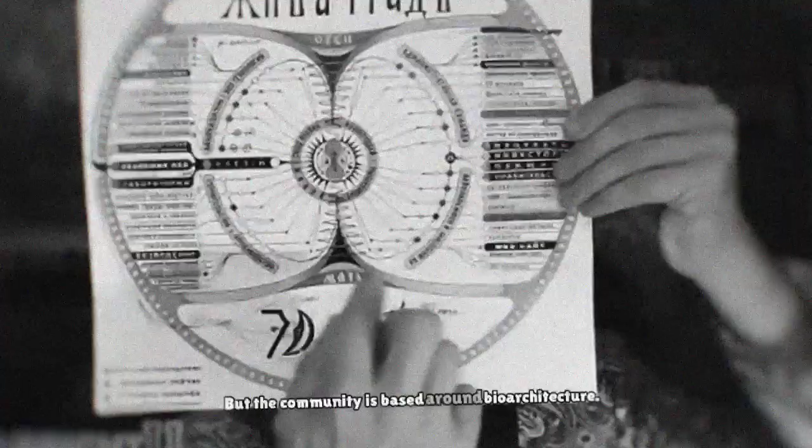People need affordable ways to build and live in homes. That's one of the reasons why I wanted to talk with you, because we need a different approach. Community is based around bioarchitecture, an intricate ecosystem inspired by permaculture. That's how we get these food forest communities with bioarchitecture and people actually enjoying living in them. This isn't just about building a house. This is about community, about how we function as societies.

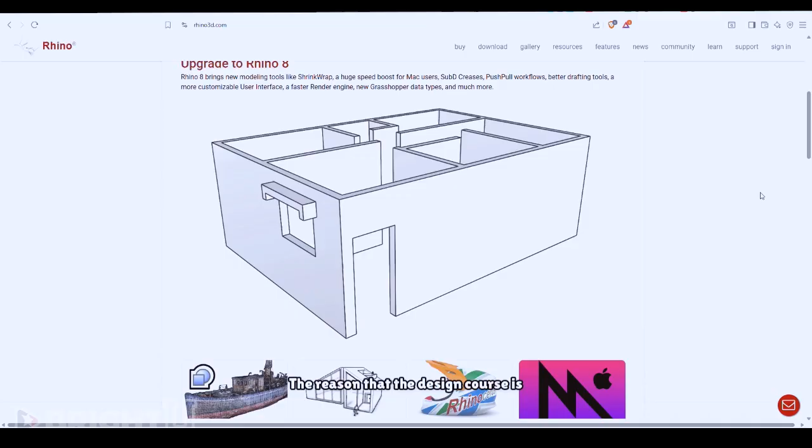The reason the design course is important is because you want to be able to draw your own home from scratch, right? Because you might have a different size than what I wanted. You might be a short person and not want a standard big door, or you want 3 bedrooms because you have 3 kids or something, you know what I mean? So you want to ultimately be able to design your own home.

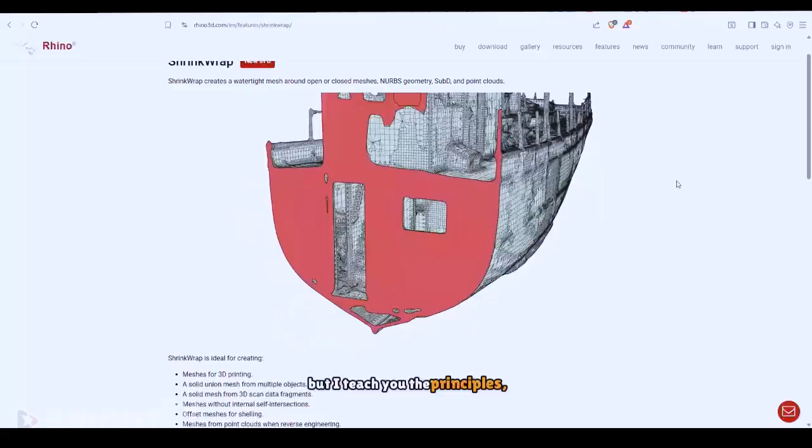But I teach you the principles — there are very important principles of bioarchitecture. The first 4 lessons cover the principles, like how close the openings have to be to each other. These are what I learned from the masters such as Mike Reynolds and Nader Khalili and those amazing architects in America, by the way.

After learning from them, I came back to South Africa and built out everything that was taught to me, and I ran multiple workshops in about 5 countries. So I replicated everything I've learned and added my own flavor, and the design course allowed me to design all these amazing bioarchitectural structures, which were very much Earthship inspired, with the greenhouse on the sunny side. So I'm about solar passive architecture, and I can show you quickly what I'm designing right now.

Could I share my screen? Yeah, hold on.

I have a question before we do that, because you mentioned you've taught these principles in many different countries around the world. One question our audience might be asking is, are your principles appropriate for every climate? Or does it only work in dry places, or only in warm places? Or can they be applied anywhere?

Well, look, Mike, the beauty is that for the last 5 years I've been living in Russia, and I'm developing a home right now for Siberia, which has Canadian-type temperatures. And the 25 years before that I lived in South Africa, which was a hot and dry climate.

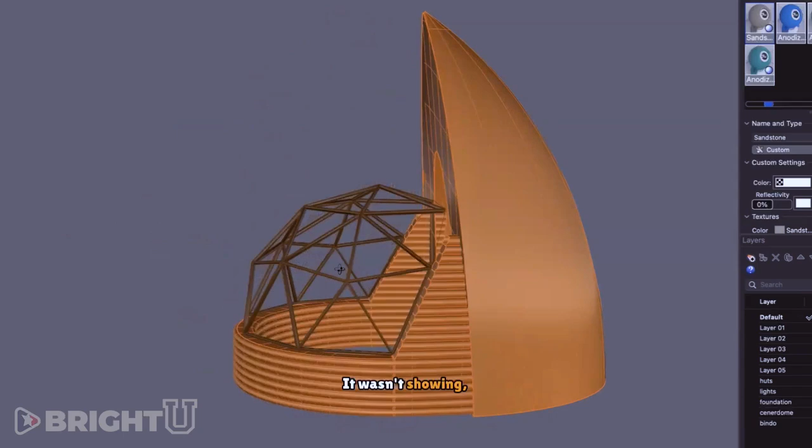Let me show you the tiniest little home, this is just the tiniest, from many years back. It's on my screen right now, I wasn't planning on showing it. But that's like a little cob earth dome and a little geodesic two-frequency dome, and this doesn't even need registration with authorities for this kind of small structure.

The coolest thing is that we're planning a waterfall of water that runs through a wetland, a water feature you can stand under and shower in. To building authorities it just looks like a water feature, a constant waterfall that keeps falling. That's why you can get away with not installing plumbing, but you can actually have a shower.

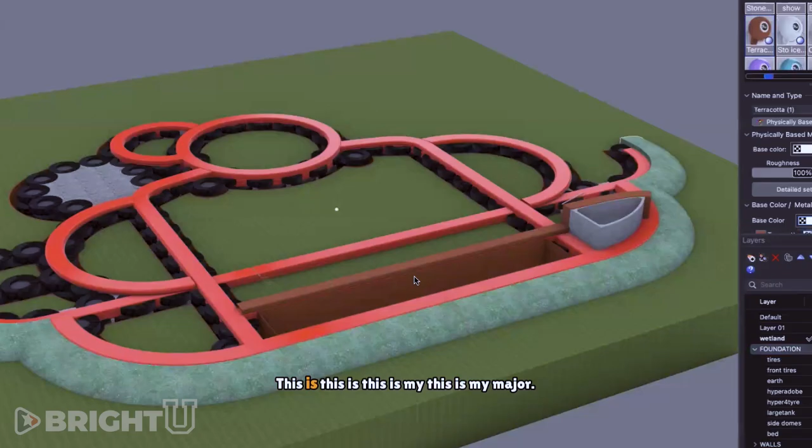Anyway, what I'm working on, the serious structure, is this guy, my major project. This is the base of an Earthship with tires, and you've got a bit of a foundation. Yesterday I drew a bath, as you can see, and let's just pump a bit of layers in.

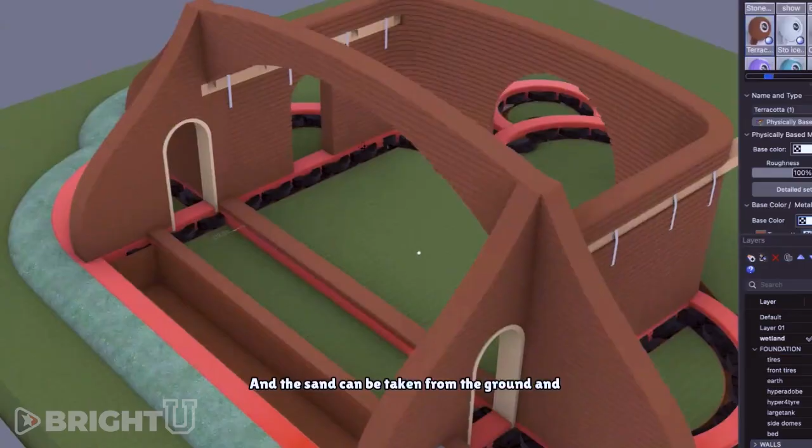So there's my walls, by the way, the walls are hyper adobe. It's 1 part cement, 10 parts sand, and the sand can be taken from the ground and from the land that you're on. So there's the side domes, also inspired by cob earth construction, with an entrance based on Vastu.

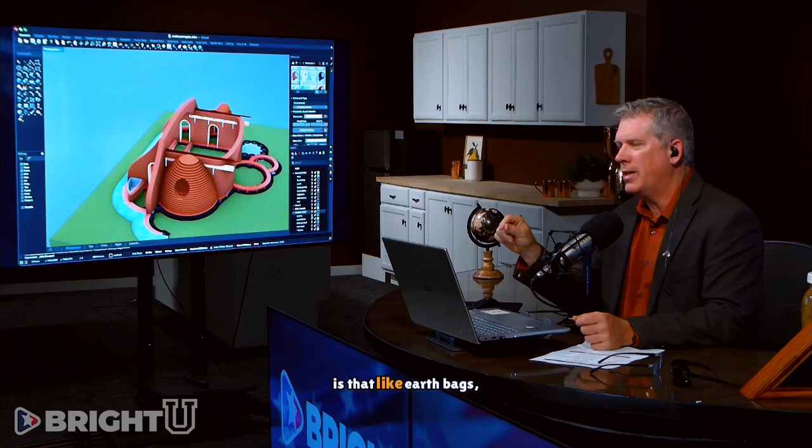Is the style of that construction like earth bags, where you mix the sand and cement and then stuff it into bags and layer the bags? Yeah.

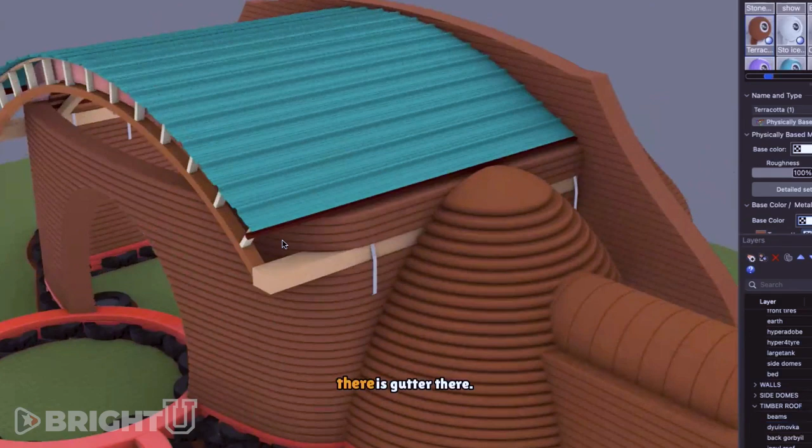But the feature of this is, you can see all the layers. So this is the program that I teach, and I love this program. There's the roof sheets, there's the gutter, everything is there.

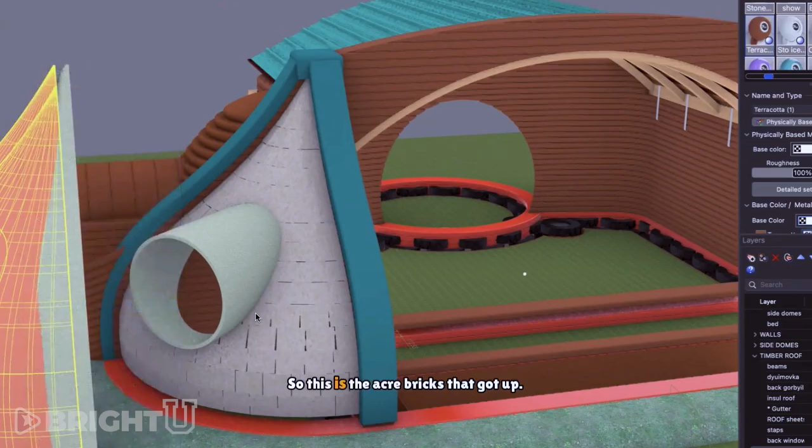And there's the onions, so this is my version of the Earthship. The onions is: there's the outer plaster, the insulation foam, and the bricks. So the same bricks I teach in the course, this is like the final frontier, the aircrete bricks that go up. You can see all the details I've gone into. So I'm doing a blueprint of this home.

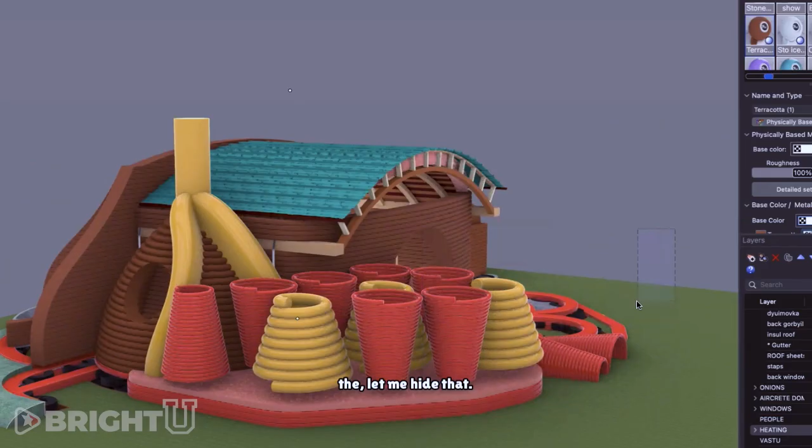So what I've done differently compared to an Earthship is I'm forcing the heat through these little spirals, basically, and I channel it through from the greenhouse. The greenhouse has this double frame, clear polycarbonate inside, and outside has some black pipes, I won't find them here now. Those black pipes channel that heat constantly into the spirals, which is part of the burial.

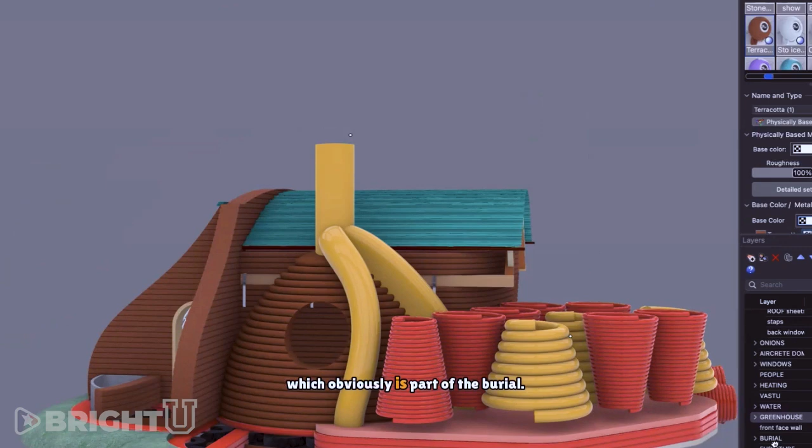We're talking about the Earthship, correct? So if we talk about the Earthship, then we've got the insulation, the isoform insulation, then we've got the first insulative layer, then the waterproofing, a second waterproofing layer, and of course our earth berm.

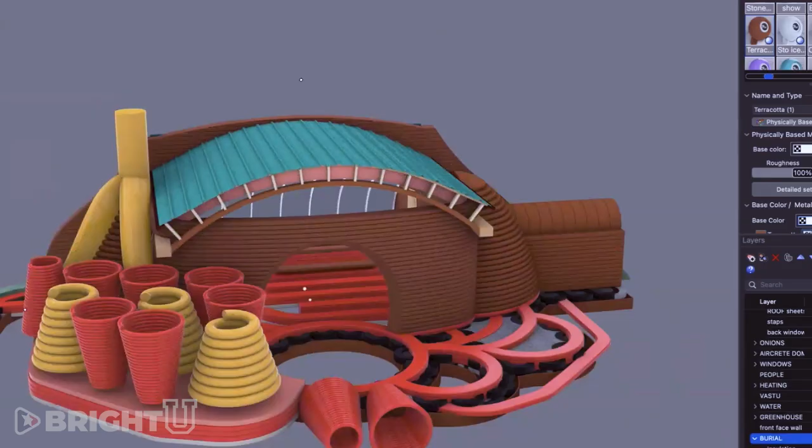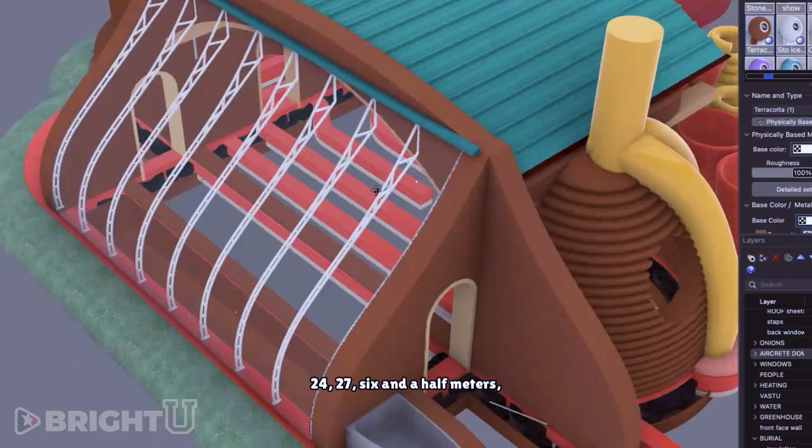And underneath, I've got all these channels, and basically through these channels I send cold air in summer from underground, and hot air, which is stored up in this berm, in winter. And that's how I get this home fully passive.

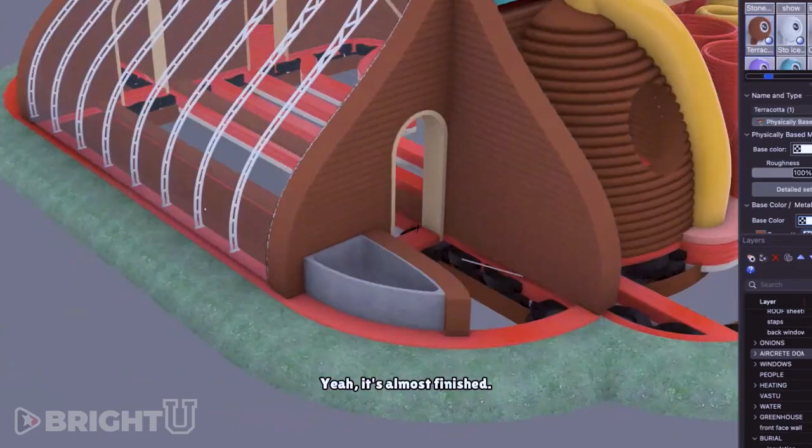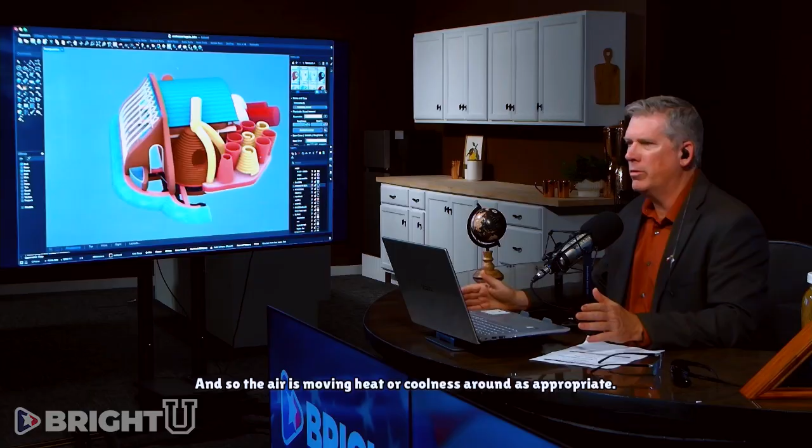Wait, so do you have fans that are pushing that air? Yeah, just tiny little small fans. And so the air is moving heat or coolness around as appropriate.

How much less expensive is this compared to a typical Western built home, wood frame, drywall, roof shingles, the whole deal? What's the cost difference?

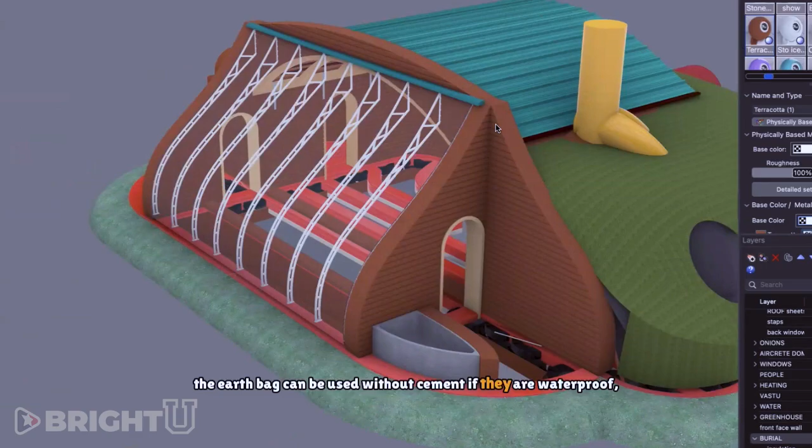Look, first of all, the earth bag can be used without cement if they are waterproof, so if the water doesn't go in there. But we do use about 10%, even 9%, so that turns all the earth bags into stone. The main thing is the labor.

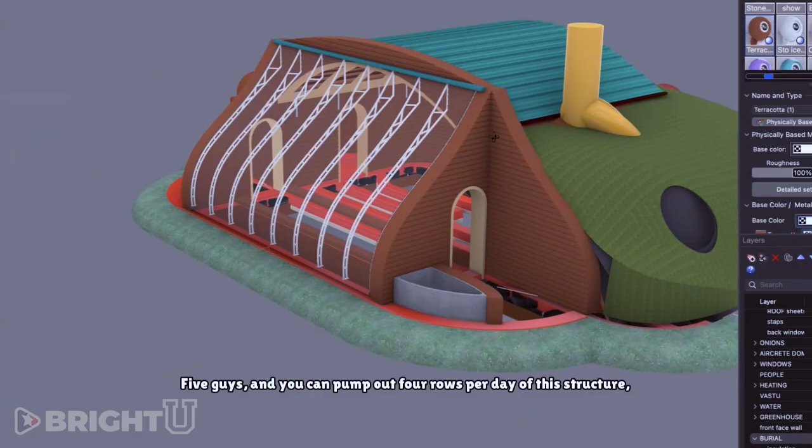If you could get, and I figured out a quick way to do this, like a large concrete mixer, 5 guys, you can pump out 4 rows per day of this structure.

Michael, the main thing is that you're never going to pay for electricity to heat this home or for cooling of this home. And second of all, if it's buried, it's not even seen. That Hobbit home that I give away as part of one of the courses can't be seen from a satellite, it's like a mound of earth from the top. So you don't even have to have this metal roof.

I don't know exactly what the costs in America are going to be, but the main thing is, if people can get the labor, get it done. The way I'm seeing it is like 3 friends getting together and building each other a home in one summer. That's really the optimal, if you don't want to use labor.

So I guess a big part of the cost is going to depend on whether you have sand on site, right? I was able to use clay, and it doesn't have to be like perfect sand. It could be little stones up to half inch big, quarter inch stones also good, clay up to 40% clay also good. But yes, sandy—you gotta, if you haven't bought land, choose land where you can get a little bit of sand, so take a spade when you choose land and actually dig a bit into subsoil and see what's underneath your feet. It'll be good to know anyhow.

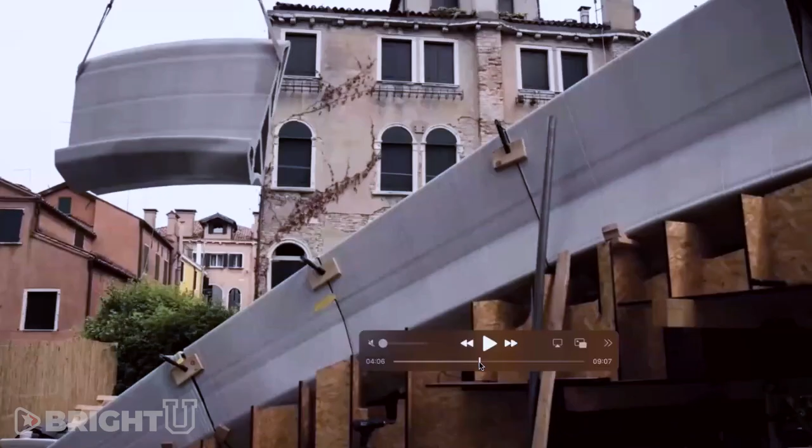So this is where we're going. I'm gonna switch off the sound - okay, look at these panels, printed offsite, placed without any reinforcement. This is where I'm going: no rebar, on a removable formwork, and then you have a structure that's in compression. Now just picture this, that it can be buried with an excavator. This is where I'm going.

Waterproofing, insulation obviously, and then up until these ridges, the whole thing gets buried. Off these parts, this is a bridge obviously, this is not a home, so it'll be much thicker, and the greenhouses will actually go off these structures. This is where I'm going. So that's one part.

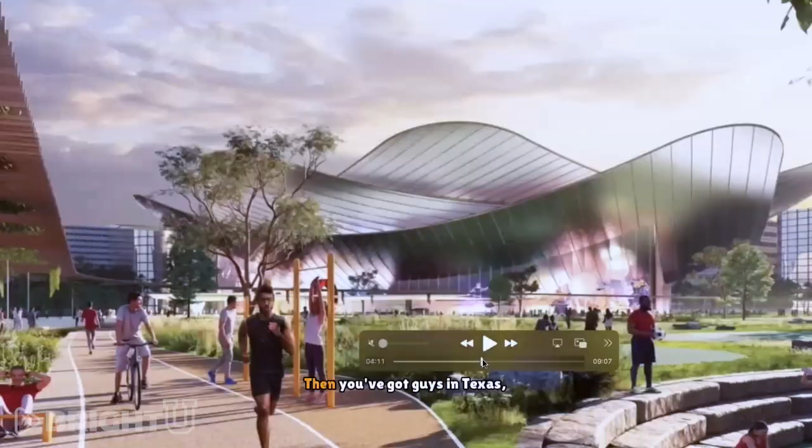So in essence, it's the same as 3D printing. All of this in the future will be 3D printed because it's the same method - it's called additive technology, you add, there's no waste in this technology. Yeah, that photo right there looks like it could be a 3D printed structure. Exactly.

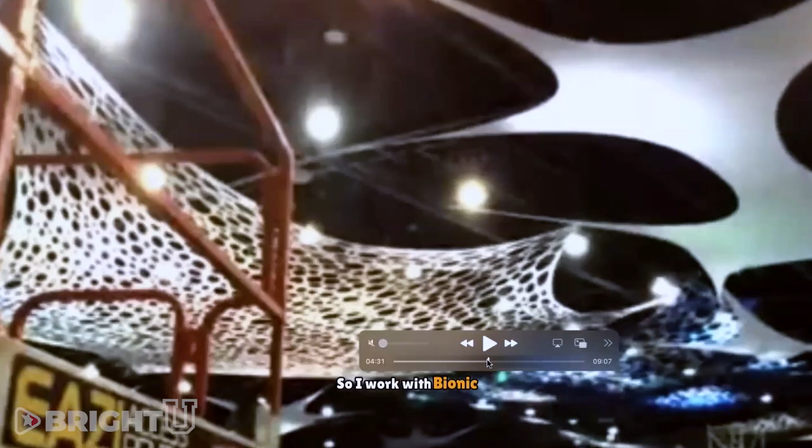Yeah, that's my history. I work with bionic shapes already, 25 years. So I'm probably one of the few architects that actually went and changed, working with curvilinear shapes for so long.

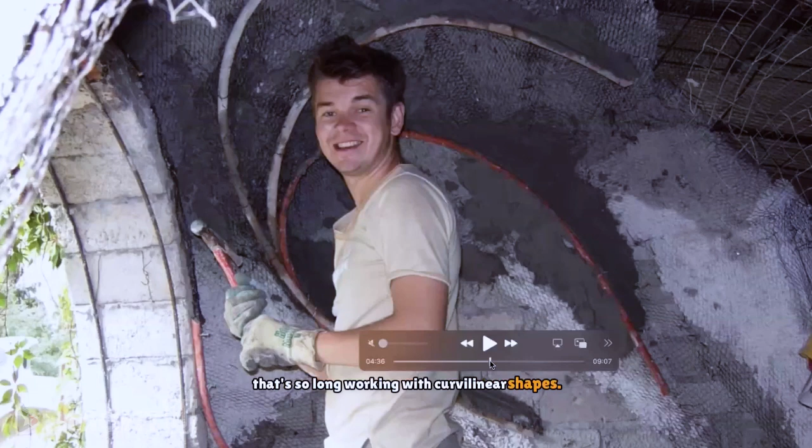Then I flew to Mexico and learned ferrocement. Of course, my next natural step was like, well, textile just gets burned by the sun, let's get it nice and solid. So that's in Mexico, San Miguel de Allende.

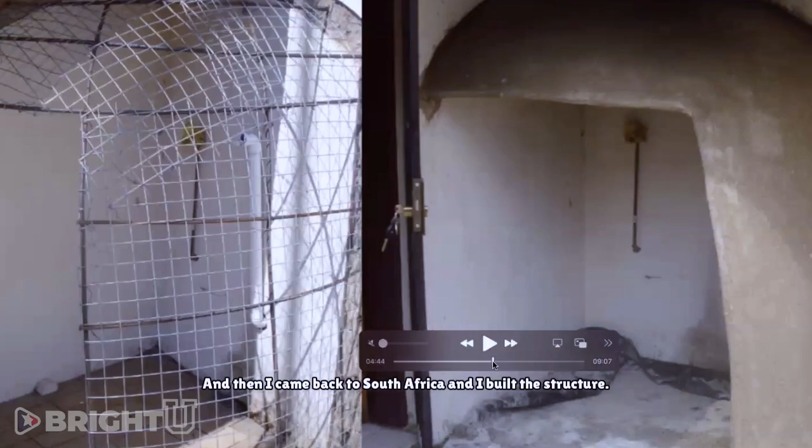Then I came back to South Africa and built the structure. So a doghouse, you know what I mean? You start small, there's a bit of rebar, mesh, and you get that. Then I went into a seashell structure, 33 foot by 18 foot. So there it is, that's all in South Africa.

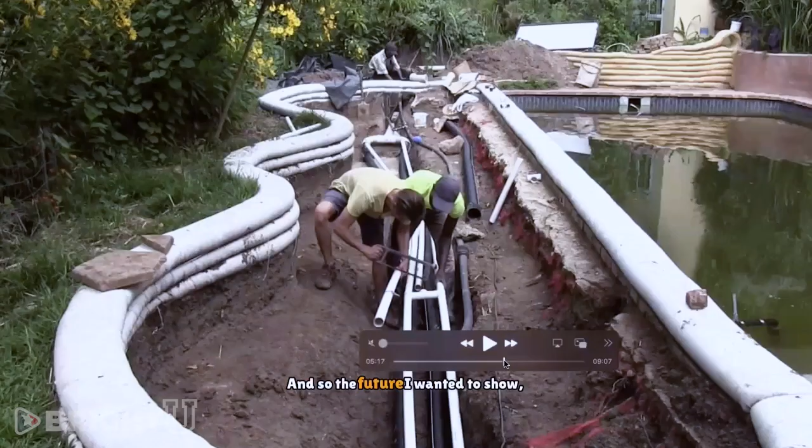Oh yeah, that's the wetland pool, the wetland for the pool. So this is all in the course, every step by step, how I took the underground water tank, 10,000 gallon underground water tank under the dome. The dome I was showing you, that's under the dome. So the course is packed full of cool stuff.

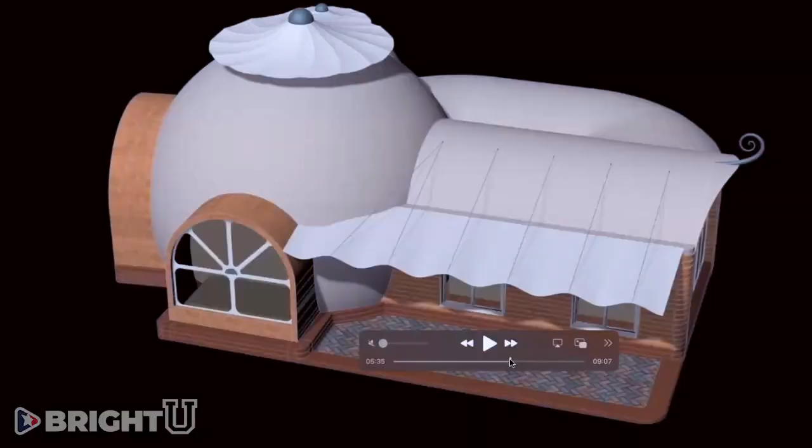So it's not just that we're making it pretty, just making some curves. No, we're actually making super strong structures. You could have a bomb go off next to that thing and it won't break, because it's also covered by earth.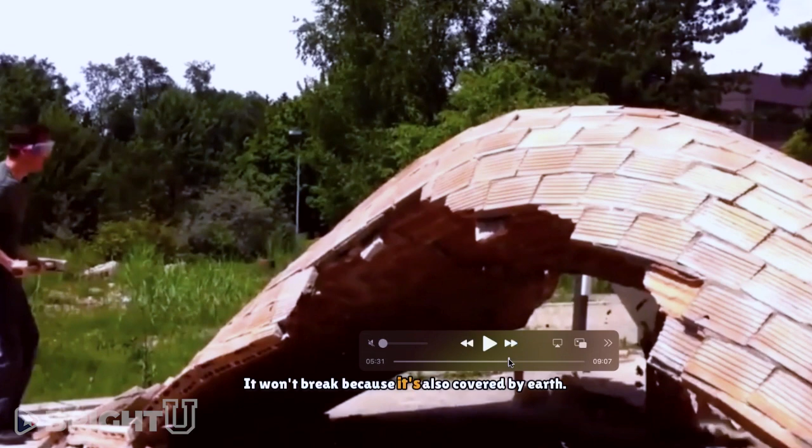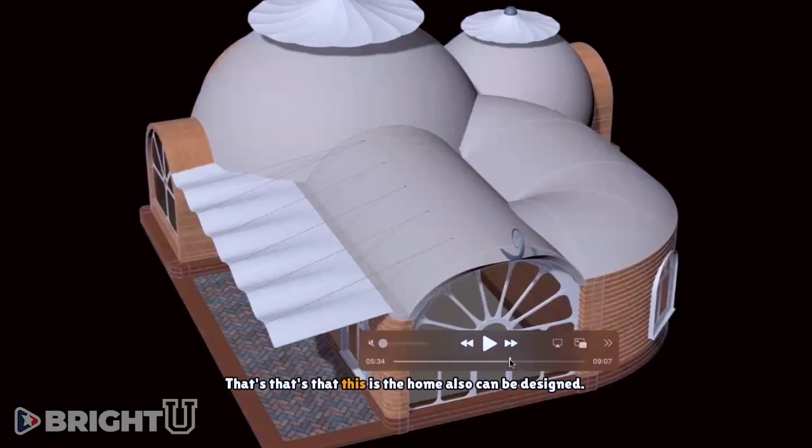So these are some of the earlier structures that Philip Bloch made, my inspiring architect. This home also can be built, designed - it's part of the course by the way. I also teach how I did that.

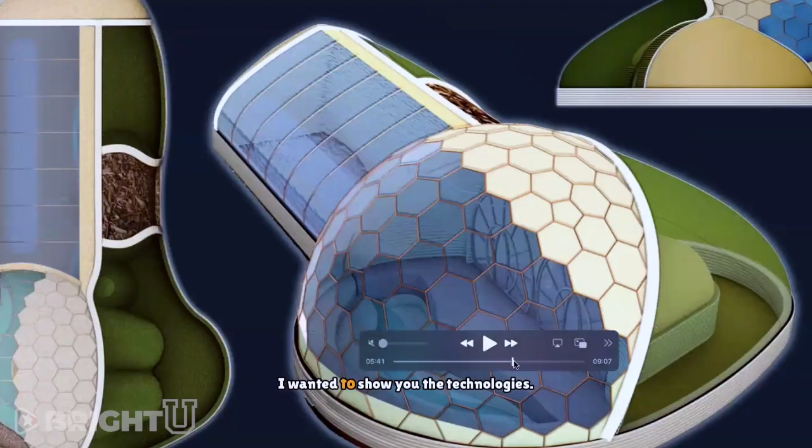And I wanted to show you the technologies. Oh, this is where we're going - we're going to build communities, starting with Arcosanti type of massive structures. Can you see how those trapezoid rooms form a giant workshop space? So that's where we're going.

Again, low cost, like I showed you - this can be made on removable formwork. So we're talking about structures that can be built without debt.

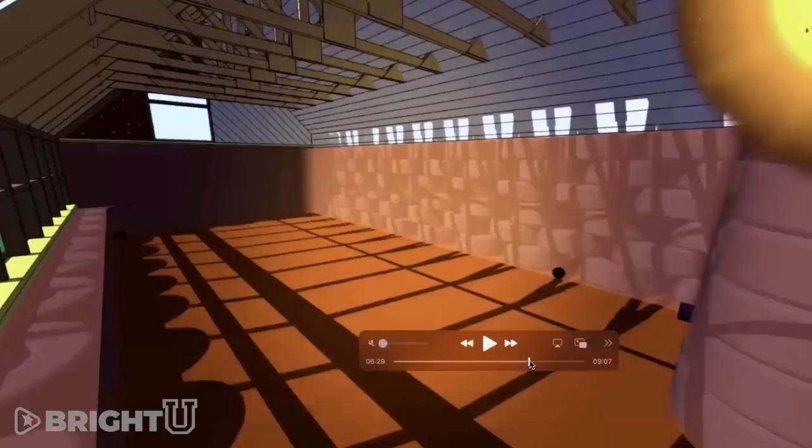Michael, I lost my home to the bank 5 years ago because I just walked out of it. I just couldn't pay, it was COVID, I couldn't pay and I walked out of it. People need affordable ways to build and live in homes, and that's one of the reasons I wanted to talk with you, because we need a different approach in society, for all of civilization. The way we build and live in houses today is not the way it's been done through most of human history. Yeah, so that's the home for $800.

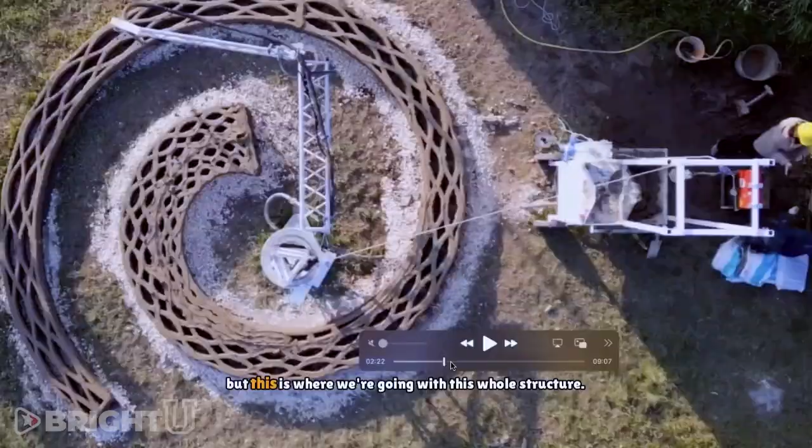This is it, wow. I see it's lagging a little bit, but this is where we're going with this whole structure. This is the future - Jacques Fresco is an inspiration, and the guys in Texas. This is what I'm searching for.

That's the guys in Texas, they've developed this printer. Hold on, here we go. It's not jumping around a lot. Here we go, it's just going to settle. Here it is - okay, oh yeah, they developed this 3D printer.

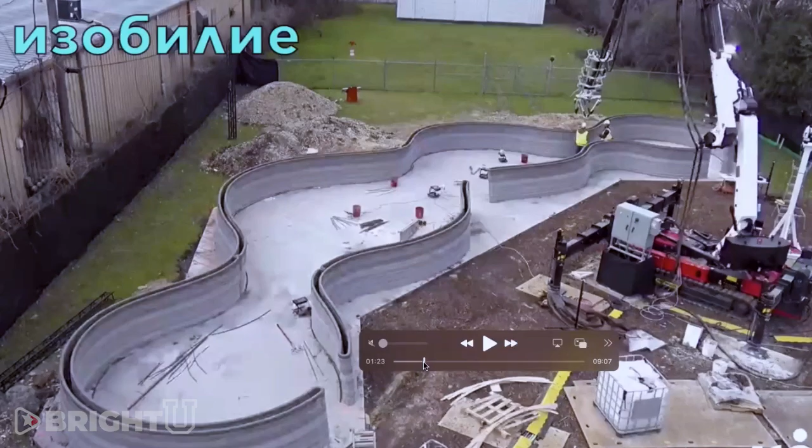Yeah, they developed it, doesn't need any rails, because those printers need rails. By the time you set up these rails - that's why I'm staying on Hyper Adobe, this material, because you don't need any rails, you don't need any 3D printer, you know what I mean? But this is where we're going, we've gotta have a bit of vision into the future. Look at that, wow.

Any shape, and then on the roof, I showed you already how we do it with those panels. So this is the future. This is where it's all going.

If me and you are going to get together and say, let's get a community going, let's build like 50 homes, then we look into the structure, then we look into these methods. But if it's a once-off home, there's no need to bring an entire 3D printer on a truck. No, if you want to print more than one home, then you bring it in.

But Alosha, we're out of time, so we need to wrap this up. Any final thoughts? I mean, this is so fascinating. I'm really glad that you're doing this and sharing this with everybody. Any final thoughts before we wrap it up?

Well, once they join my Telegram group, I'm going to explain to them how I see we're building the community. I put the great spirit in the center. We call it by different names, but it's the one singular source. And these are all the people we need to be able to pull off new types of communities.